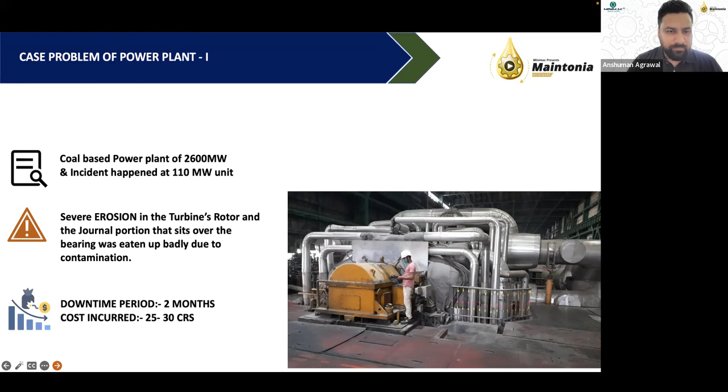The next case we have is from a refinery, and this refinery was having equipment like the wet gas compressor, and the wet gas compressor was tripping very frequently. The main reason behind it was there were seal and gland failures happening. There was a lot of axial vibration, and the suction knockout drum had been observed out there. The key reason behind all these problems was foam formation in the lubrication system, which was actually diagnosed over the period of time.

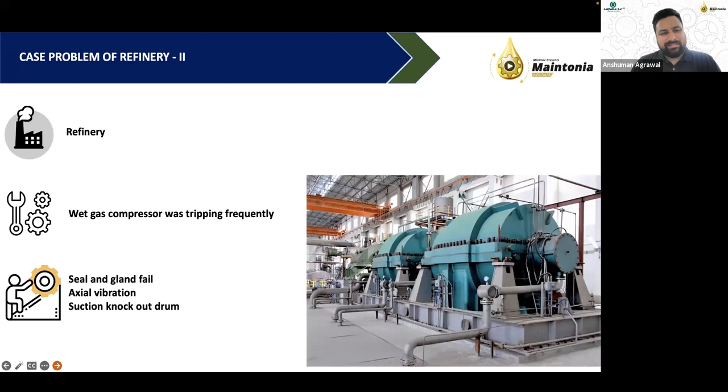The third case is from a steel plant. And in a steel plant, there are large-sized lubrication system tanks in an integrated steel plant. And these are centralized lubrication systems. So they have tanks up to a capacity of 40,000 liters, 50,000 liters. And these tanks are actually partitioned by baffle systems inside the tank. And because of foam formation, what was happening in this particular case, the oil was not able to reach the suction side of the pump.

So there are two parts in a tank which are baffled by an intermediate baffle. So the oil was quite high in level on the return side of the tank, but on the suction side of the pump, the oil was getting starved. And this was happening because of foam formation and many other associated contaminants in the lubrication system.

So in order to find out the answers around such case problems, I would like to invite my friend Rafe Britton, who has actually given his valuable time. And he is based out of Australia, so I'm sure it's already late night out there. But he was kind enough to give his time to share his experiences, his learnings, and his findings around foam formation in lubrication systems. So over to you, Rafe.

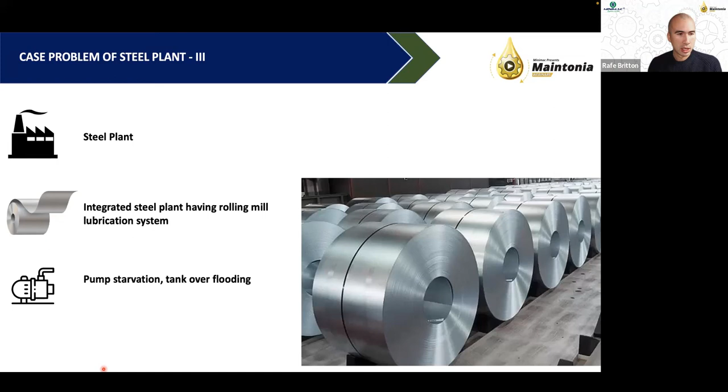So in terms of the agenda, we'll talk about types of water in oil systems, the negative effects of water, water removal methods, and then move on to types of air in oil systems. Talk a little bit about the physics of air in oil. There's some misunderstandings as well about the nature of foam and when does foam get worse versus when is it not so much of a problem. So we'll talk a bit about that. The negative effects of air in oil systems, as well as strategies for controlling air in oil systems.

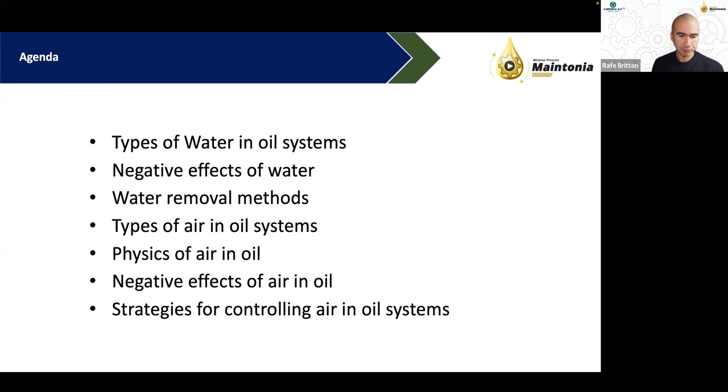Okay. So let's first off start with the types of water in oil, just so that we all have a bit of an understanding. So first of all, there are kind of three types of water in oil. The first is dissolved water. This is water that's not necessarily apparent, right? You can't see it. There's no droplets or anything like that. It's just within the bulk of the lubricant. Now, that kind of water isn't all that dangerous, to be honest.

And as a general rule of thumb, when we want to know how much dissolved water is okay, the rule of thumb that's given is often if you take an oil sample in a clear bottle and you place a newspaper behind it, you should be able to roughly read the newspaper. So as the water content gets higher, the oil tends to get a little bit more cloudy to the point where eventually you won't be able to read the newspaper. That's kind of a general rule of thumb that I use.

Okay, the second type of water that we have is free water. So this is when the oil and the water have completely separated out, and it will be very obvious, right? Either there'll be a little bubble of water at the bottom of your sample, or it'll be a layer that has completely separated out. So free water typically will sit at the bottom of our oil systems, because of the differences in density, right? Water has a specific gravity of 1. Mineral oils are in the ballpark of, let's say, 0.86 to 0.9.

But of course, there are exceptions to this rule, right? If you're using a polyalkylene glycol, which is very common in, for example, gas compressors or even worm drives for gearboxes, that has a specific gravity which is higher than water. And so the water will actually sit on top of the oil. Polyol esters, which are very common in jet oils, have a specific gravity which is almost exactly 1. And so it's not obvious how the water would necessarily separate out.

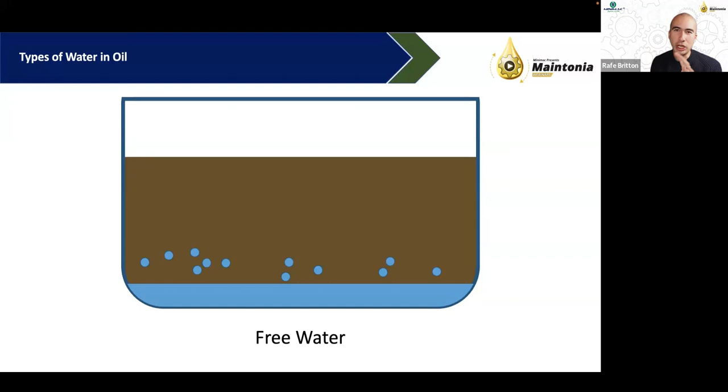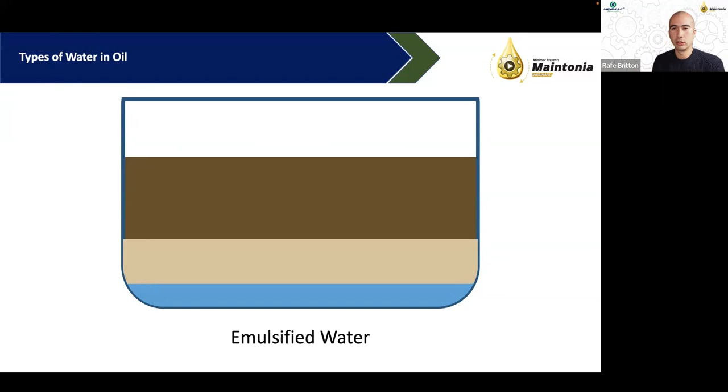The third type of water is emulsified. So generally you can think of emulsified water as a dispersion of micro droplets of water which are mixed in. And generally it presents itself with that milky appearance. And we'll talk a little bit more about emulsions as well. Okay, so they're the three general types of water that you'll encounter. Now, you should probably be familiar with the saying that oil and water cannot mix, right?

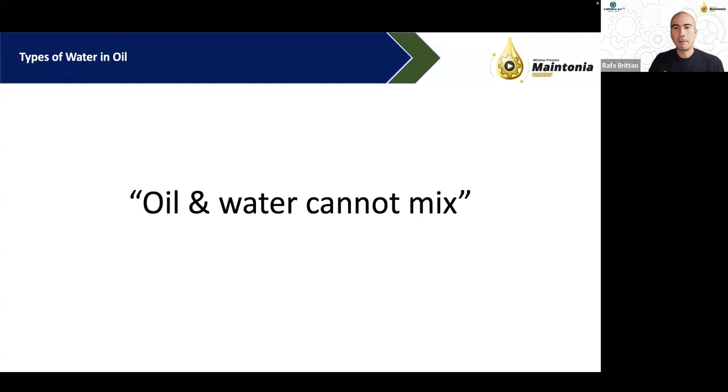This is something that my grandfather used to say to me all the time, but he was talking about girls I dated, saying that there were certain girls that were not right for me. But oil and water cannot mix is kind of like a universally understood expression. But the fact is that there are many oil and water mixes that we encounter on a day-to-day basis, and we may not even think about it.

So butter, for example, is an oil and water emulsion, right? It's a mix of animal fats, which are oils, as well as some water. Same goes for milk, right? Milk is an oil and water emulsion where the two are mixed together. So let's think about why is it that water and oil generally don't mix, and then we'll talk about the cases in which they do mix.

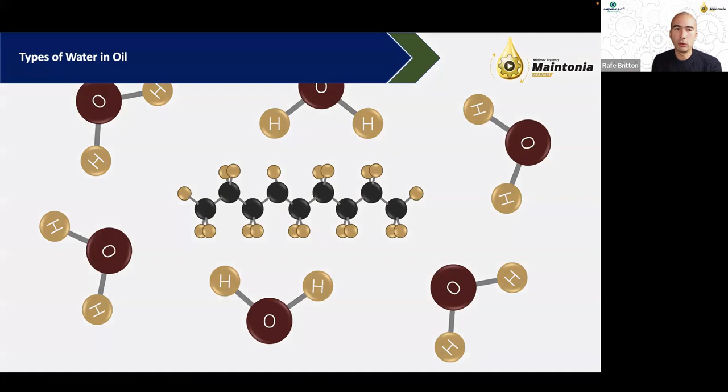Okay, so why don't water and oil mix? Fundamentally, it's because they're dissimilar molecules. So water, for example, is highly polar and can form hydrogen bonds. So if you were to look at it, the hydrogens are generally what we would say positively charged, and the oxygens are negatively charged. Whereas most oil molecules, and this is very true for the paraffinics, especially for synthetic polyalphaolefins, because they're straight chain mixes of carbon and hydrogen, they don't really have any net charge to them.

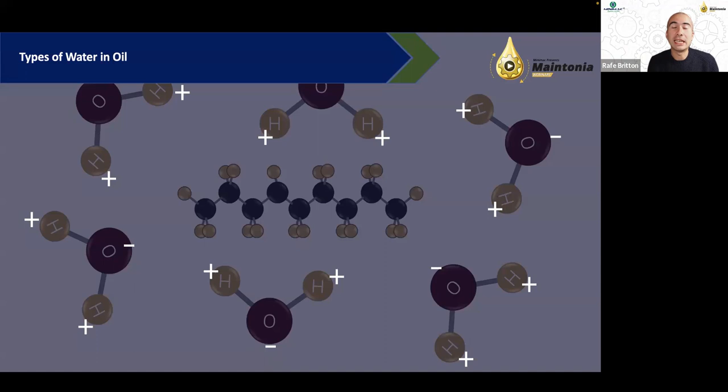So as a result, it's not necessarily that the oil wants to separate out from the water, in so much as the water wants to stick to itself, because all the negative charges want to line up with the positive charges, right? We know that the opposites attract. So if all the water wants to coalesce and come together, it's kind of going to exclude all the oil. And that's why we get that separation of water and oil. It's all got to do with differences in polarity.

Now, that should immediately trigger something in our mind, because we know that not all oil systems are non-polar, right? So esters, for example, are quite polar. Polyalkylene glycols are even more polar than that. And so they tend to mix with water differently.

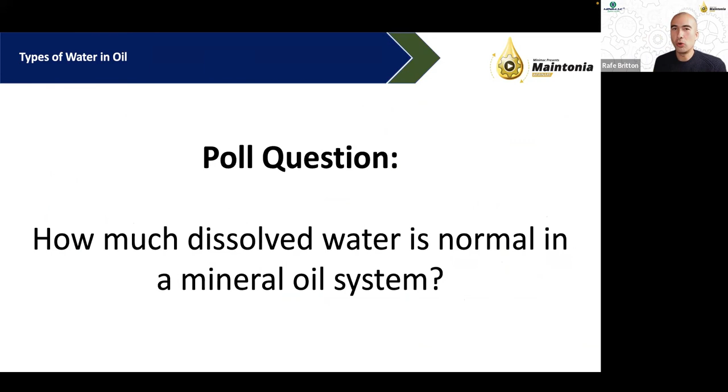So I'm going to start with our first poll question. And the poll question, first up, how much dissolved water is normal in a mineral oil system? And the options I'm going to give you is 1, 0 to 100 parts per million, 2, 100 to 1,000 parts per million, 3, 1,000 to 10,000 parts per million, or 4, 10,000 to 100,000 parts per million. And I'll just briefly wait for your responses.

All right, 0 to 100 was the most common answer, which is really interesting. So in my experience of testing most oil systems, I tend to find that 100 to 1,000 is pretty normal. And that's because in mineral oils, especially the group 1s, there is a certain amount of polarity. And so they naturally tend to pull some water out of the air, right? So they're what we would call hygroscopic. As a result, there is a certain amount of dissolved water in the oil.

Now, what's interesting about this is that the answer varies depending on the oil condition as well, right? So we know that, for example, a new oil will tend to take on less water than an older, aged oil. So through the aging process, as an oil oxidizes, it becomes more polar, and therefore that increases its affinity for water. So oxidized oils tend to take on more water.

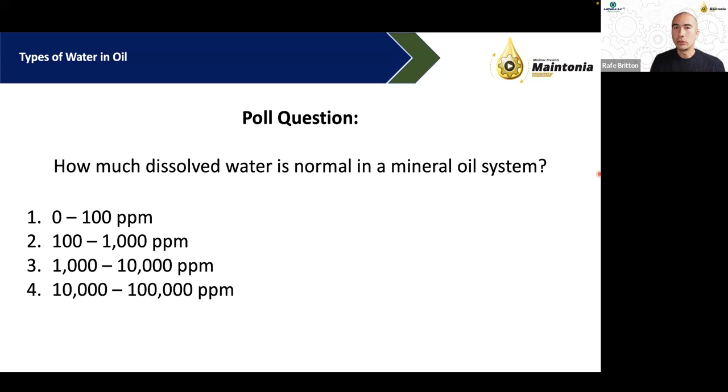Now let's talk a little bit about how emulsions form as well. So, for example, you will have encountered probably mayonnaise at some point. Mayonnaise is yet another oil and water emulsion. So the two main ingredients of mayonnaise are vegetable oil, usually, and water. And how do you make it? If you've ever made mayonnaise from scratch, it's actually an exercise in mixing oil and water, and we whisk it together with an egg. So, why is the egg, aside from taste, crucial to the process?

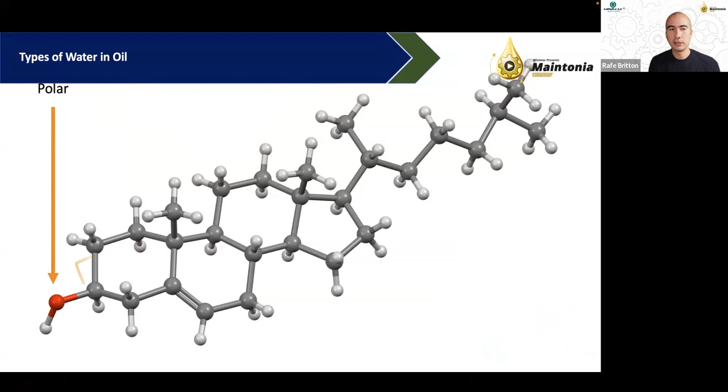Well, the actual key part of the egg, which is helping to bind the oil and the water together, is this molecule, which you'll be very familiar with because this is actually a cholesterol molecule, right? So obviously cholesterol is supposed to be very bad for you, bad for the heart, etc. But what we're interested in here is its characteristics and how it wants to bind with both water and oil. And the reason it can do that is because cholesterol, being an alcohol, has a polar functional group at one end, and then this long kind of oily tail.

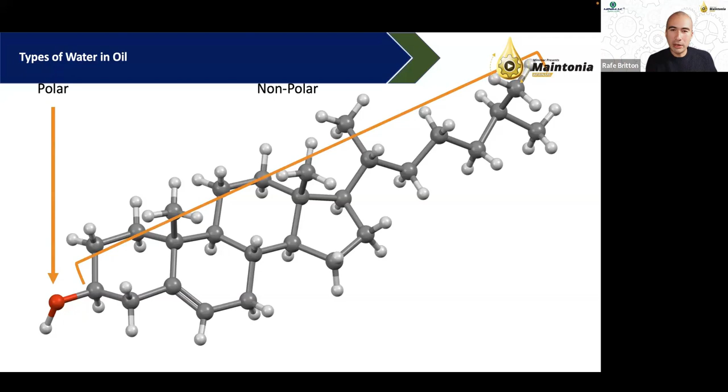So we have a segment, all the stuff in gray wants to bind to oil, and the red bit, which is the oxygen, wants to bind to water. So if we have a cholesterol molecule in an oil and water system, the head of the cholesterol molecule is going to want to bind to the water. The tail is going to want to bind to the oil, and it can then hold that micro droplet in suspension. And if we have enough of these dispersed throughout, then we can create a stable emulsion.

Now, what are the problems with having water in your oil system? Well, one is viscosity control, right? Usually you would think that if you mix two things, the mixture would have a viscosity which is the average of the two components. So vegetable oil is quite thin, water is quite thin. Theoretically, mayonnaise should also be thin. But of course, what we know is that mayonnaise is substantially thicker in viscosity.

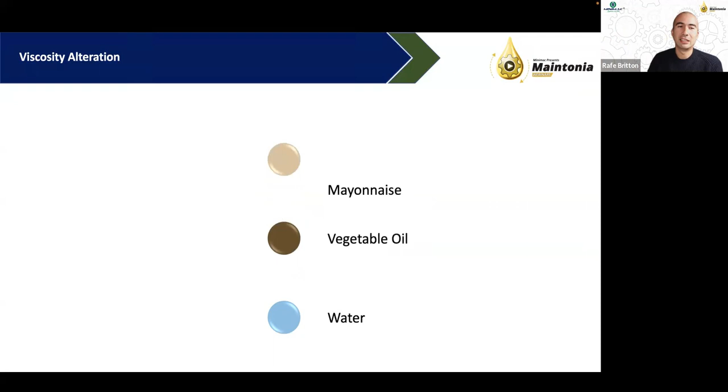In the order of about 6,000 centistokes. I have no idea who actually measured mayonnaise in a viscometer, but apparently it's been done. So 6,000 centistokes is vastly higher than either vegetable oil or water. And that can be problematic. If we create these emulsions, it takes so much more energy to pump that oil around our system. Maybe we run into oil starvation problems because our pump is not able to generate enough pressure to get a significant enough amount of head through all our supply lines. So that can be a huge problem.

Not only that, but we're wasting energy. And as we waste energy, we increase the amount of heat, and heat obviously leads to oxidation. So generally, emulsions are hugely undesirable.

Oh, sorry, I had a question come through, which is hydrolysis. What is hydrolysis? We are going to get to that question in a later slide. So, Mohammed, if you wouldn't mind just holding on for a second.

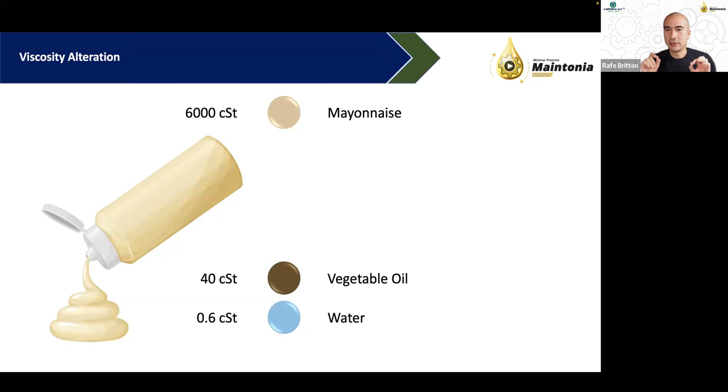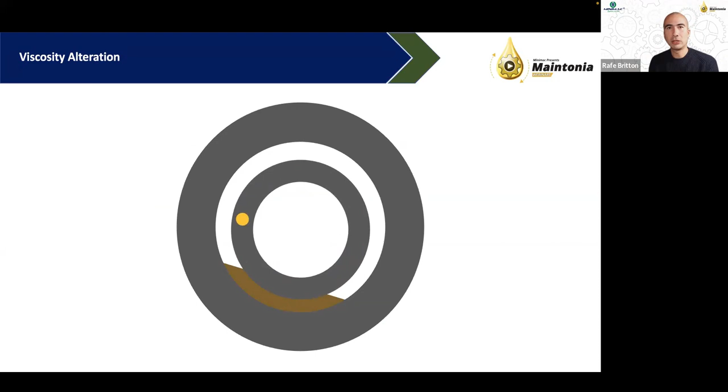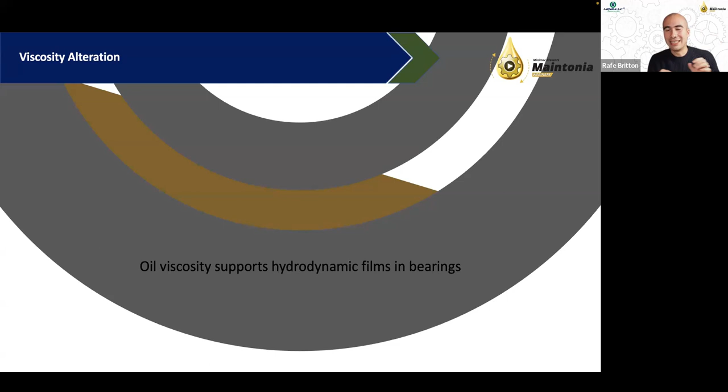All right. Then we have viscosity alteration as well, in terms of what happens if free water gets into our load zones. So, for example, with a journal bearing, the two surfaces are separated predominantly by the base oil, and it's the base oil's viscosity which is giving us that separation. So it supports both hydrodynamic as well as elastohydrodynamic film thicknesses. But if we have free water in our system, then at some stage that free water is going to get to the load zone, and water just isn't able to support the same kind of load that oils are.

That's why we don't use water as lubricants, because otherwise they would be very, very cheap and plentiful. And we would love to use water as a lubricant, but it's not effective at protecting machine surfaces. So as a result, we get a collapse in that film thickness, and we get a whole bunch of excess wear, which is obviously going to be damaging to all of our equipment.

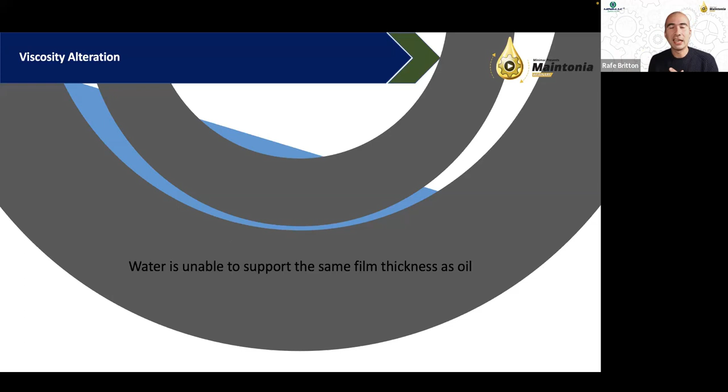So the viscosity alteration is kind of two-pronged. If we get free water into the load zone, it collapses. And if we get emulsions in our system, that can lead to excess heat, excess energy, as well as oil starvation. Now, another problem with having water in your oil system is a process known as cavitation. So typically we associate cavitation with air bubbles, but in actual fact, what can happen is if you get

Think about where there are massive changes in pressure in your oil system. Typically where it occurs is at the pump, because you're taking a liquid that is at low pressure on the suction side, and then you are charging it with very, very high pressure as it goes to the discharge side. So if you have a vapor bubble which is created, then as you exert a whole bunch of pressure on it very, very quickly, you are going to collapse it and also vastly increase the temperature as well because of the ideal gas laws.

So they've taken some high-speed camera images of what a collapsing water bubble actually looks like. And effectively what it does is the water bubble kind of implodes in on itself, and you get this almost like a supersonic jet, which is hitting the metal surface, and slowly over time, it will pit that metal surface.

So if you've ever seen cavitation on a propeller of a boat, for example, you will know what that looks like. And in your pump, you'll be able to recognize it by the sound. So it'll sound like someone has thrown marbles into your pump, into your oil pump. It will be a very, very unusual sound, and that will be an indication that you have cavitation, which will very quickly lead to all kinds of erosive wear.

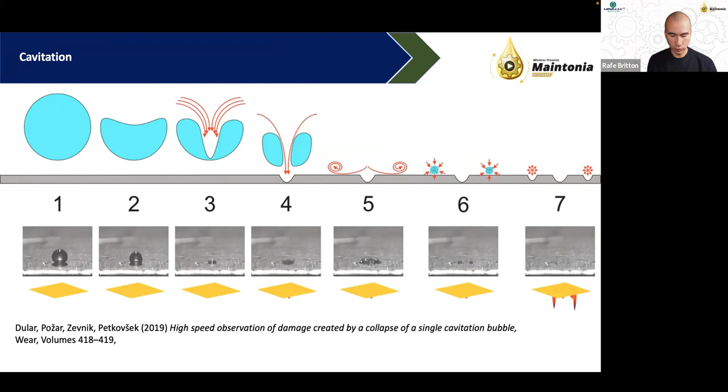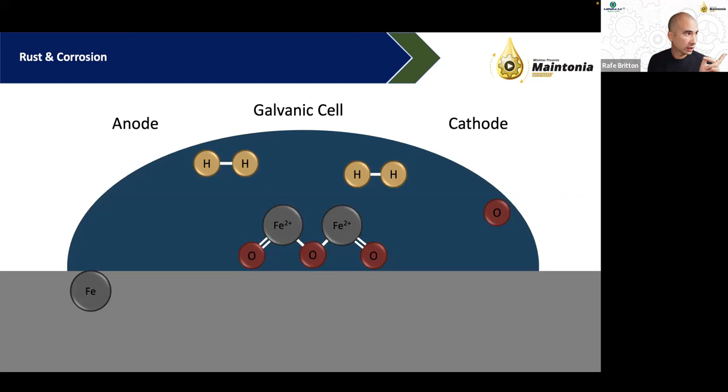And another problem with having water in your oil system is the problem of rust, right, and corrosion. We know that water is kind of essential for creating rusting systems, right? So the presence of water can be really problematic. Now, just to get on to Mohammed's question, right, we're now going to address hydrolysis.

Okay, if you want to create an ester, so any of the synthetic esters, for example, the way that you create it is you react an acid with an alcohol. Now, for example, among the aviation jet oils, so all of the turbines that are bolted to aircraft, they are polyol esters. So you're reacting, generally it's an acid that's derived from palm oils with a synthetic alcohol, and you get a polyol ester and you get some water. And then what you need to do is you need to dehydrate the water away, right, to leave yourself with just the ester.

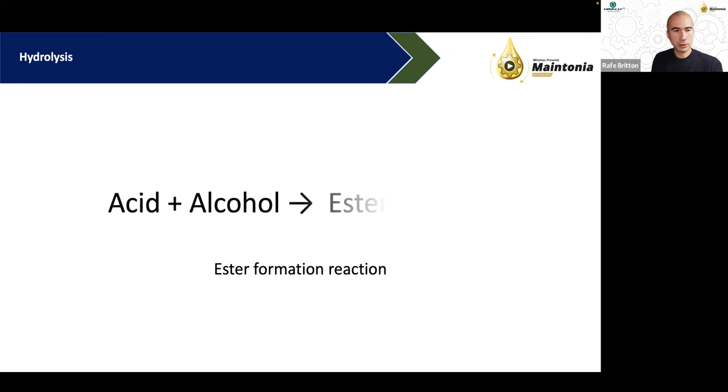The problem is that if now an ester comes into contact with water, what we're actually doing is we're driving this reaction in reverse. So we're upsetting the equilibrium. And so an ester will actually break apart and it will form an acid and an alcohol, right? Now, that's undesirable because obviously that's raising the acidity of our oil. So our total acid number will go up.

But not only that, acids promote even further corrosion, right? So the presence of water alone is going to potentially cause corrosion. But then if we include acids into that water phase, we're going to promote even more corrosion, right? So that's one example of a hydrolysis reaction. But hydrolysis doesn't just occur in esters. It occurs in all kinds of lubricants.

So as an example, there are many additives which are basically metal salts. So the way that you create a salt is by reacting an acid and a base. So as an example, the most common anti-wear additive in the world is an additive called ZDDP. You may have heard of it just being called zinc, right? Its actual name is zinc dialkyl-dithiophosphate.

And it's created by an acid-base reaction, right? It's the reaction of basically a thiophosphoric acid with a zinc oxide. And you get ZDDP, which is actually a metal salt. Well, what that means is that if we add water to ZDDP, we get a similar kind of reaction. It hydrolyzes and it wants to devolve back into its components.

So I'm going to show you something which I think is a pretty cool bit of chemistry, to be honest. I know the audience here is more of a kind of industrial bent, but I want to show you what happens in engine oils when we expose zinc to water. This is a really important reaction, right? Because water is one of the most common contaminants and zinc is one of the most common additives. So we'd love to understand what happens when the two come into contact with each other.

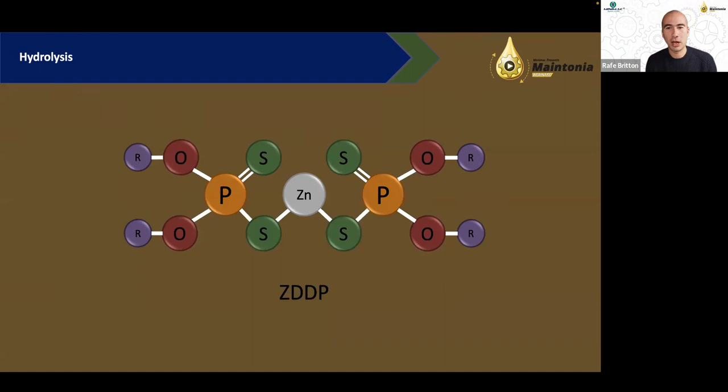Okay, so let's say, for example, I have a ZDDP molecule and I'm able to react it with a decent amount of water. How would this happen? Well, obviously, we've already talked about some of the sources of water, but in an engine, if you got a coolant leak, for example, into your crankcase, that would be a prime case for where this would happen, right? Because obviously, most coolants are about 50% water and 50% glycol.

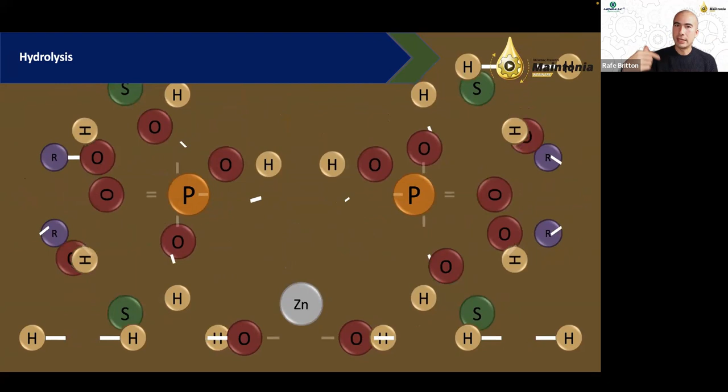Okay, so the water reaction with ZDDP is going to be that hydrolysis reaction. And it devolves into a number of different components, right? Chemistry here is a little bit complex, but let me just point out some things to you. All right, so on the screen here, in the bottom left and bottom right, that's H2S, right? Now, the problem with H2S, hydrogen sulfide, it's that rotten egg gas.

When it oxidizes, H2S forms SO2, which oxidizes again to form SO3, which when mixed with water forms H2SO4, which is sulfuric acid, right? And as you can probably appreciate, it's not good to have sulfuric acid in your engine, right? It can do all sorts of damage to particularly copper-based and lead-based crankshaft bearings, as well as big and small end bearings, right?

Not only that, but we have the formation of these alcohols, and alcohols tend to be slightly acidic as well. So we're adding more acids into the system. We've got a little bit of base with this zinc hydroxide, and then these molecules in the middle are called phosphoric acid. So again, more acids that we're creating, which are bad for our oil system. Now, the thing which is unique,

Just quickly, Mohammed has asked, can we say that hydrolysis is a water reaction with another material? Generally, yeah, I guess that's probably true. So in an oil system, we just generally say hydrolysis reaction is what happens when water causes some kind of molecule to decompose, right? Hopefully that's a decent answer to that.

Now, calcium phosphate forms crystals, right, which look like this. And I'd just love to see maybe in the chat box, does anyone know what this is, just by any chance? So far, no answers, but I'll give you a clue. The source for this picture comes from stonerelief.com. So what we've actually created is a kidney stone, right?

So there are obviously many different types of kidney stones. I've heard that passing a kidney stone is one of the most excruciating experiences that you can ever have in your life. Like, it's on par with herniations. I hesitate to say childbirth because I have no experience of that, right? But I've heard it's unbelievably painful. And that's because they're so abrasive and they're so hard as well.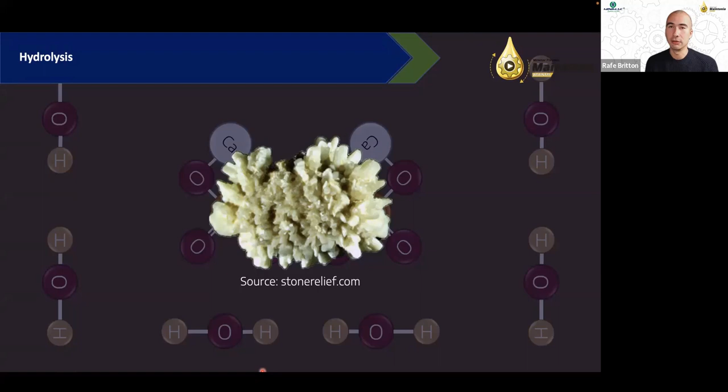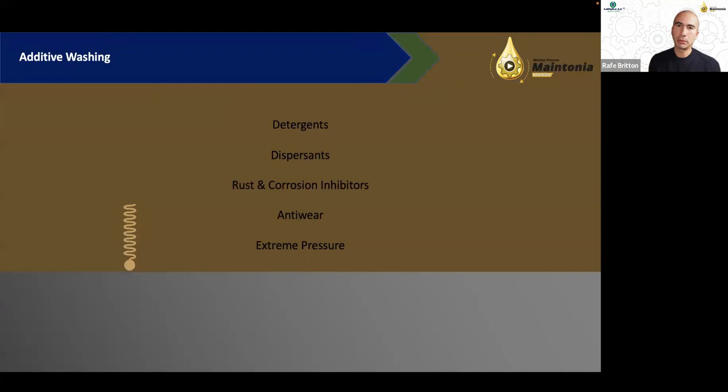And you are actually creating kidney stones in your engine as the result of the reaction of water with some of the additives in the lubricant system. So again, hopefully I'm impressing on you the fact that water is bad for your oil system. Not only that, but it can also cause disruptions in the way that the additives behave. So a lot of these surface acting additives, the whole purpose of them is that they're supposed to want to bind to contaminants.

Now, you've got to remember, additives are dumb, right? They don't have a mind of their own. So the way that we get them to connect to something else is purely by polarity. We can't tell them to go to a specific place. So a contaminant comes in, it's typically polar. So these detergents and corrosion inhibitors will want to stick to something that's polar. Well, water is also polar. In fact, it's more polar than most of the contaminants. And so it can sometimes attract all those additives and sort of throw them off the scent.

So we've established that water is terrible for our oil system. So how do we actually prevent it from getting in there? So number 2 poll question. And I've seen a couple of questions have also come through, so I'll address those too. So next poll question. Do you think that water can penetrate a sealed oil drum? I'm only going to give you 2 options, yes or no.

And while that's being answered, Sharik has also asked the question, why is there a suction problem in the pump's power pack? And I believe that's probably related to our slide on cavitation. Do you think that water can penetrate a sealed oil drum? Vast majority say yes, and that's excellent, right? That's really good because it can, and we'll address that very, very soon.

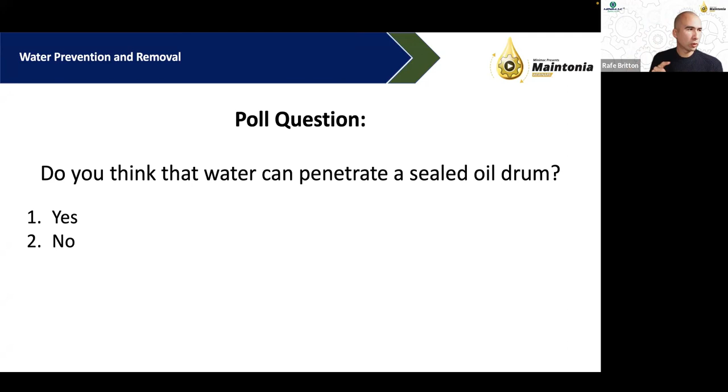Okay, so let's talk a little bit about water control strategies. So if you think about sources of contamination, we sort of have to think about what is the life of a lubricant. And it goes from manufacturing right down to when we use it in the application. Now, most of the people on this call are end users, right? And so you don't get much of a say in the manufacturing, packaging, and distribution. Where your responsibility really kicks in is in storage through to using it in the application.

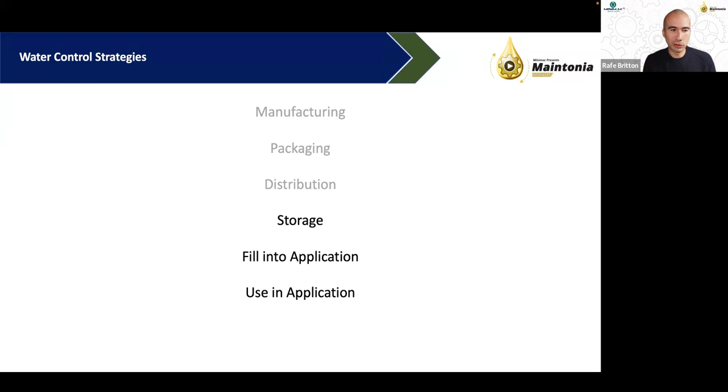So let's talk a little bit about storage. And this is when we talk about the drum. So the problem with oil drums is that they can't be airtight. And the reason for this is because you need to allow a bit of thermal expansion. So let's say, for example, I leave an oil drum outside and it's got some rain on it. There's some condensation. You can see there's some water on the lid of the drum. Now, if we have the sunrise, then the warm oil is going to heat up and it's going to expand, and it's going to expand more than the drum does. So it's got to force air out somehow, right? Otherwise, the lid would basically pop right off.

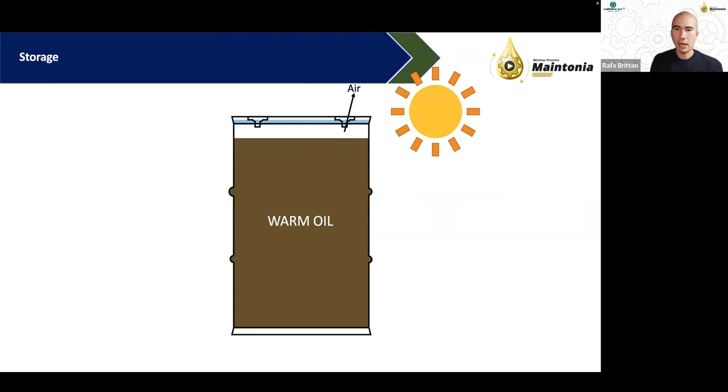Now, when this whole system cools down, you're drawing a vacuum in the headspace, and that's going to cause that water to be drawn through the bungs, right? And so that's how water can get into sealed containers. So it's really important, even when we have perfectly new oil, to do everything we can to store them. In a climate controlled environment with an air conditioner would be perfect, but that's not practical, right? So at the very least, if we can do it, indoors.

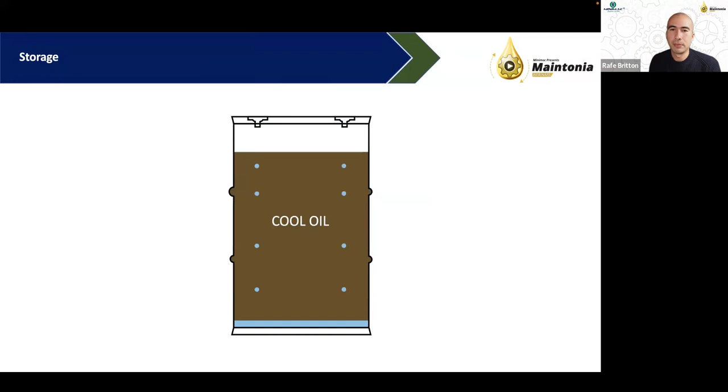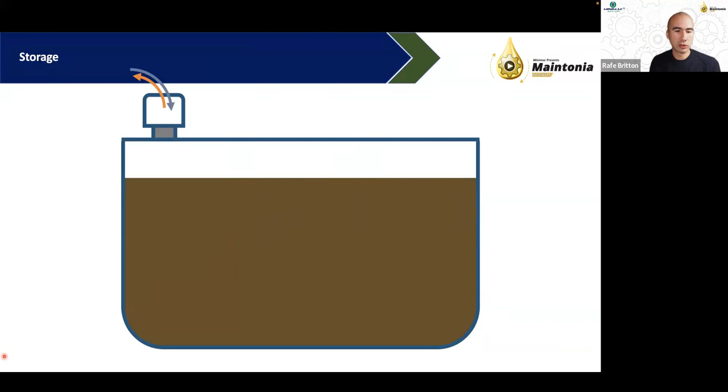All right. The other thing as well is about using desiccant breathers to prevent water from getting into the headspace. So this is just a very, very simple and cheap way of reducing the amount of water that ingresses into your oil system, right? So the way that these typically work is that humid air is coming through, right? The desiccant is exactly the same as the silica gel that you often find in food packets. And it is hygroscopic. It likes to take on water. And as the air passes through, it gets dried, and then dry air goes into the headspace.

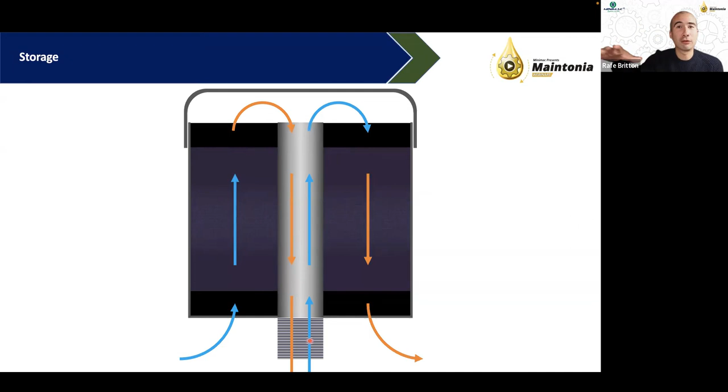Now, unfortunately, some of these breathers are built such that they actually dry the air coming out as well. And that's going to mean that you use up the desiccant at twice the rate that you need to. In reality, what you want is a one-way valve, because you don't care if the air that's exiting is wet, right? You want it actually to bypass the desiccant. So that's one thing to look at when you're purchasing these.

All right. So we've already talked about water ingress prevention. One of the other ways that we can get rid of water is by trying to coalesce all the water droplets, right? Now, this rather complex equation that I've got up on the screen is how fast a water droplet falls when it's in oil. So this is called the Stokes equation, and you can use it to calculate the speed of a metal ball, for example, dropping in a cylinder full of oil.

So it's dependent on the density of the water and the density of the oil, the viscosity of the oil, gravity, because that's the thing that's pulling it down, as well as the radius of the water droplet. So if I can increase the radius of the water droplet, it's going to fall faster. It's going to separate out faster. And so we have a bunch of coalescing methods, which are designed to coalesce all the water together.

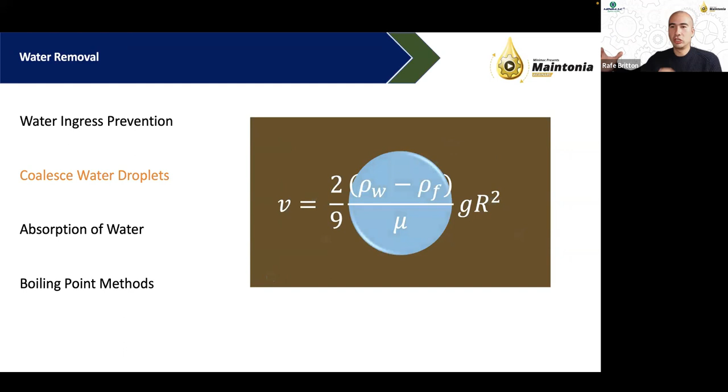Now, the other way that we can do it, which is a little bit cheeky, is that we can also increase the gravity term, right? You might think, well, that doesn't make any sense. How can you increase gravity? But that's how centrifuging works, right? So we can have a centrifuging filter, which is designed basically to increase the rate of acceleration. And as a result, the water will separate out much faster. So that's another method that we can use for removing that.

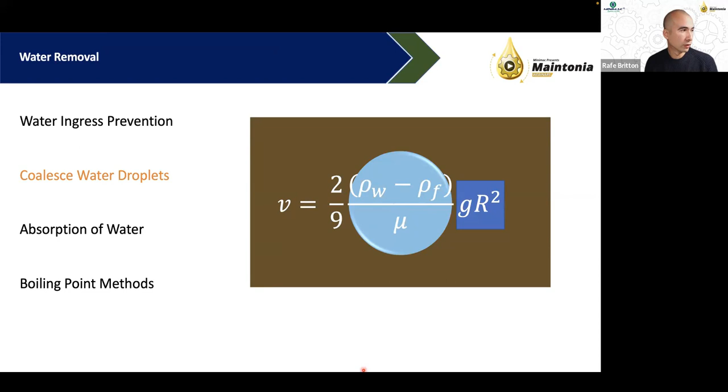Okay, absorption of water. So, just regular cellulose, which is to say paper-based filters, can actually absorb a small amount of water. I wouldn't want it to take on thousands of parts per million.

But, just as if you leave wood out in the elements, it will warp and it will expand. And that's because timber, which is also made of cellulose, is hygroscopic. It takes water out of the atmosphere. Our cellulose media filters will do exactly the same thing, right? They'll tend to take on water. There are also some super absorbent filters that can help remove water as well. So that's something to look at.

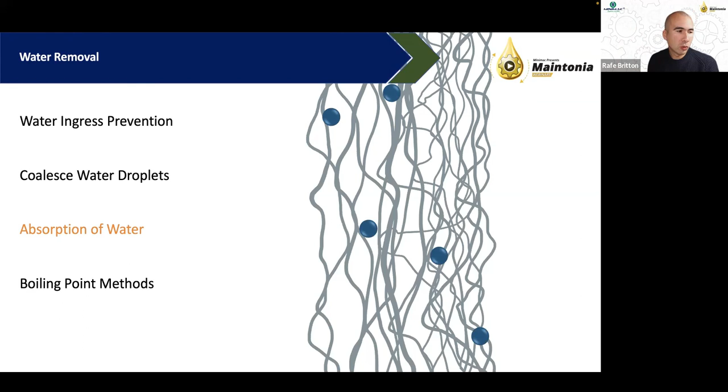And one of the final ways, which is probably the more expensive, but very, very useful for high volumes of water, is those boiling point methods, which is basically vacuum dehydration, right? So as the atmospheric pressure reduces, the boiling point of water also reduces. So the idea is that if we can create a vacuum in this headspace here, then we can reduce the boiling point of water down to, for example, 60 degrees Celsius or something like that. And then we only need to heat up the oil to around 60 degrees Celsius, and then the water will effectively boil off.

Right? Now, these are obviously going to require a little bit more maintenance, because now you have a pump, which is under a fair bit of negative pressure, but it can be worth your while if you're trying to remove a lot of water at one time.

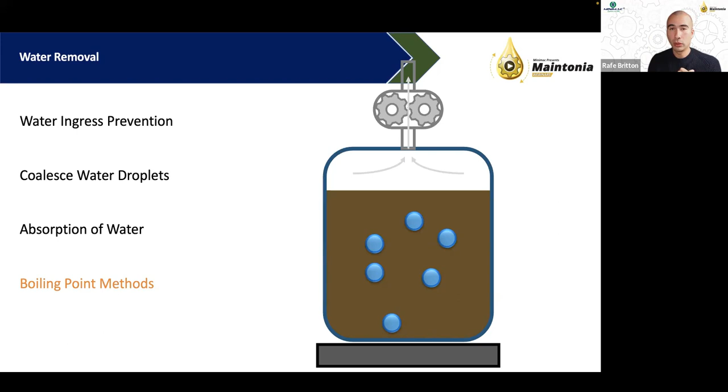All right. So Amos is asking about foaming in a lubrication tank. So we're going to talk about foam now, right? Because one of the other negative effects of water, which seems a little bit counterintuitive, is actually foam formation. So let's talk a little bit about the types of air. We already talked about the types of water in oil. Now let's talk about the types of air. Just like there was dissolved water in oil systems, we also have dissolved air. You can't see it, it's not apparent, but it's there.

And in a mineral oil, my understanding is that around 7% of the volume is probably actually dissolved air. In something like a polyalphaolefin, it's probably lower, around 2% or something like that. So that's dissolved air. Not much you can do about that, because the amount of dissolved air is more or less determined by the atmospheric pressure.

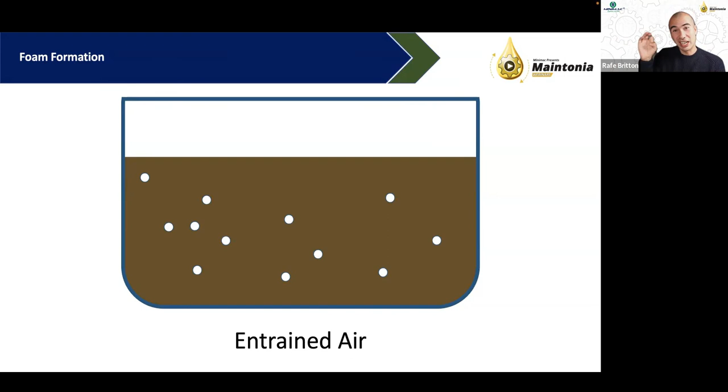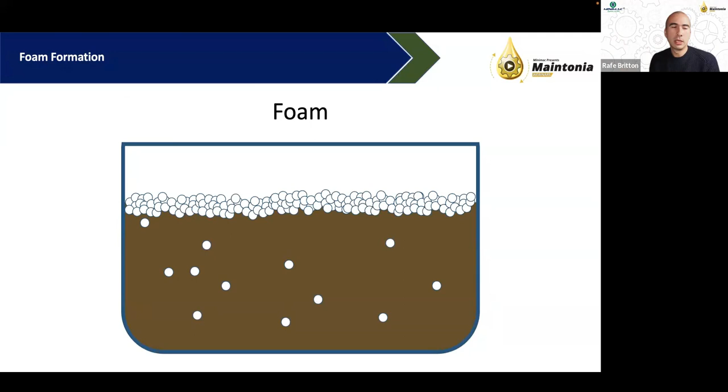All right. Then there's entrained air. Entrained air is held within the body of the lubricant. So we have little bubbles in the body of the lubricant, and if you ever drank a Coke or a beer or anything like that, those micro bubbles that are in the liquid, you would call that entrained air. Then we've got foam, right, which sits on the surface of the tank. That's kind of the difference with foam. And then, of course, there is another type of air which is often neglected, which is free air, which is the actual headspace itself. So four different types of air.

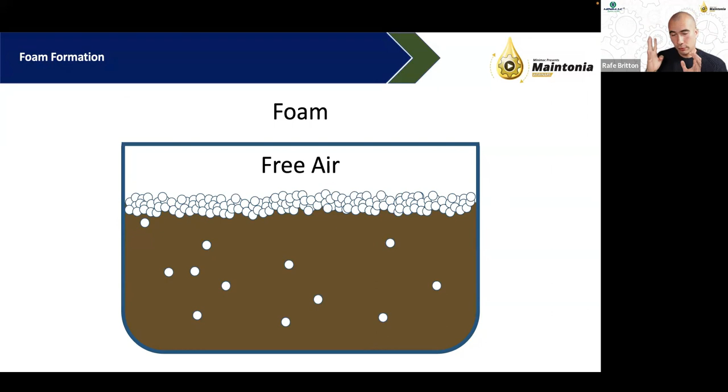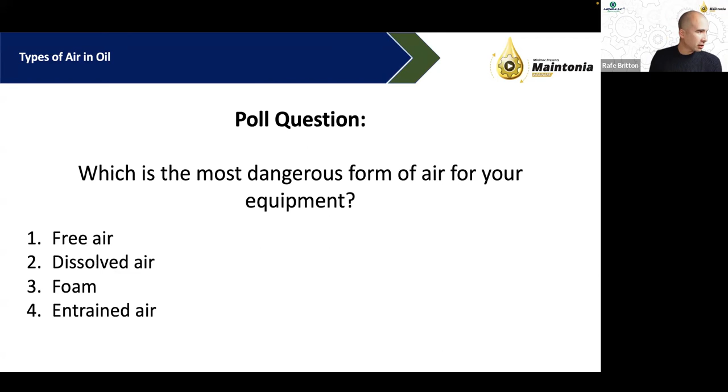Now, I noticed that in the Q&A box, Pradeep has also put in a comment that online filtration machines will help keep us on track. And that is true. Where at all possible, use filtration, right? I know there are plenty of places which are not using any kind of filtration at all. But like I said, even cellulose-based filters that you would be using to pick up particles can actually pick up a small amount of water as well. So that can help with controlling the amount of water.

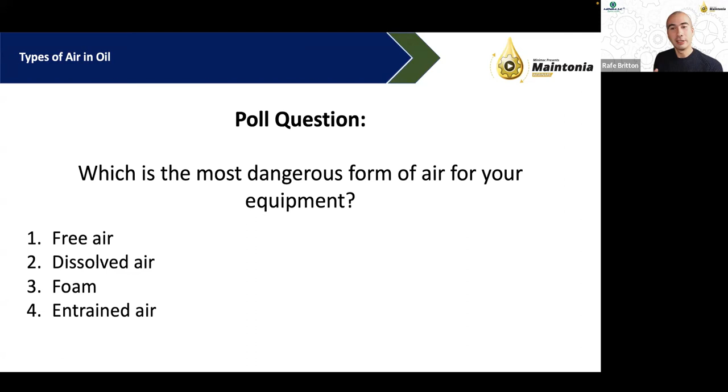All right, we have some answers. That's interesting. Okay, so foam is the leader with 49%, dissolved air second with 26%, and entrained air at 21%. Now, I'm going to go through the reasons. I think foam and entrained air could both be the correct answer to this question, just to be clear. But the difference is that foam is actually necessary for the functioning of an oil system, right? So in some cases, foam can be beneficial. I can't think of any cases where entrained air is beneficial, right? So let's talk about that a little bit more.

All right, so let's talk about foam formation and when that's a problem. Foam formation can typically be a problem from a safety perspective, right? If we have foam that's actually spilling out, now we have oil on the floor. That's a safety hazard in terms of slips, trips, and falls, right?

Obviously, oil is very slick. That's the whole point of oil. So that is undesirable. It also gives us a lot of difficulty when we're trying to control the oil level, either in the application or in the reservoir, right? So if you're looking through a sight glass and there's a lot of foam, often you can't tell where the oil level is, and that can become a problem.

Similarly, in a gearbox, typically you want the oil level, let's say, half to 2/3 of the way up the teeth. And if you're unable to see that because of the high amount of foaming that has occurred, then we may be either over or under lubricating our system. And so that can be a problem as well.

Another major problem is air locks. So what does this mean? It basically means that in an oil line, typically where you have a bend or a high spot, you'll get the foam migrating to the high spot. You can think of air as being like a restriction. It's almost like an orifice. And so where that restriction happens, there's a big pressure drop.

And if the pressure drops so much that you end up with negative pressure at, for example, the suction side of the pump, now the pump runs dry. And that can also be a massive problem because now you starve your application of oil as well. Right? So that can be a major problem.

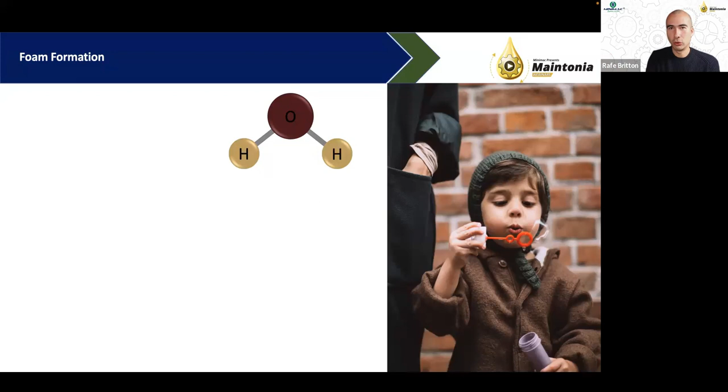So, for example, if you have tried to blow a bubble with just water, either when you were a kid or with a kid, you will know that blowing bubbles with water is a good way to make a kid upset, right? Because nothing will happen. Similarly, if you try to do it with oil, it's almost impossible to blow bubbles with oil, right?

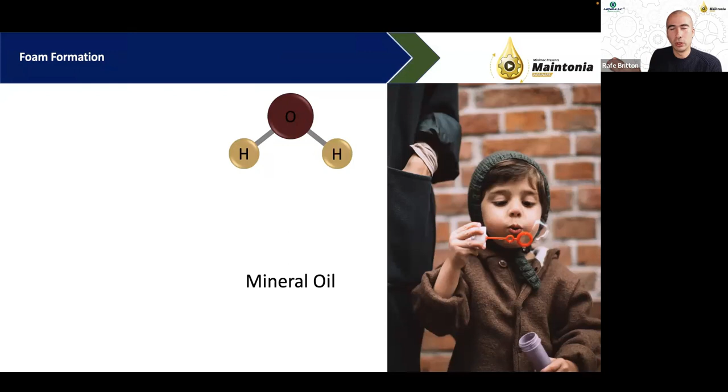Correctly formulated mineral oils and particularly polyalpha olefins, which are very, very nonpolar, display almost no foaming tendency. And that's why polyalpha olefins are very popular in formulations for, for example, gear oils or wind turbine gear oils, because they have very low foaming tendency. Now, as you go up in polarity, you're increasing the surface tension. And I could do a whole other hour on how surface tension works.

But basically, for our purposes, water has too much surface tension. Trying to blow a bubble with water, in material science you would describe it as a brittle fracture. The film is so tight that when you try and put any air through it, it just snaps. Oils, on the other hand, have too little surface tension, which means the bubble film is too thin and can't support the pressure you're blowing through it, and so it breaks.

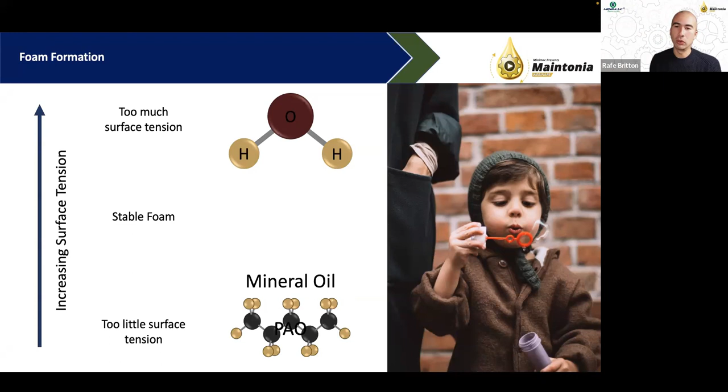There is this kind of Goldilocks zone where we can create stable foam, which is in between water and a mineral oil. And that's one of the reasons why water ingress into your oil system can lead to a foaming problem, because water in your oil system raises the polarity of the overall oil system and can get you into that stable foam level. So now we can generate stable foam.

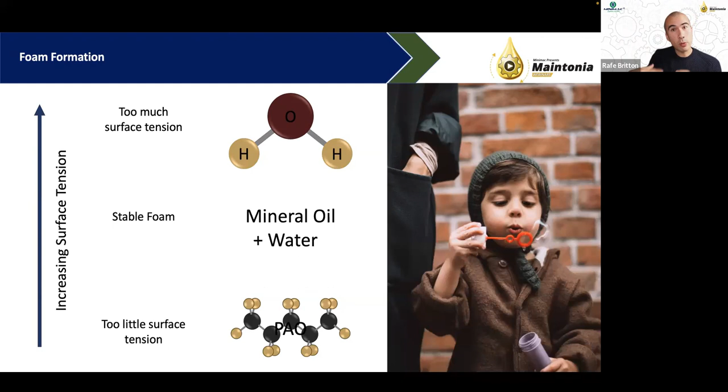The other thing that can do it as well is either soaps or polar contaminants. So where do polar contaminants come from? Oxidation, dust, all kinds of contaminants are polar and therefore can create foaming problems. So often when you see a foaming problem, it is the result of contamination.

Soap, you might think, how do you get a soap into my oil system? Well, grease thickeners are typically soaps. So if you have any amount of grease contamination in your oil system, that's likely to cause a foaming problem as well. Typically this happens when people use grease to seal gaskets and things like that, and a little bit of grease ends up in the reservoir. Now I have a foaming problem.

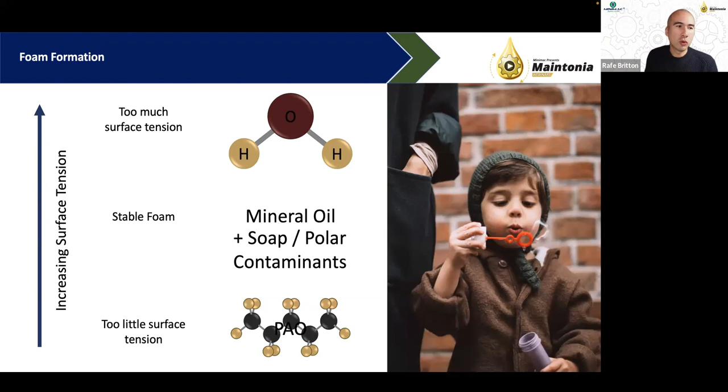And that's because people aren't aware that grease has a soap, and soap results in foam. So that's the problem with foam formation. Now let's briefly talk about the dangers of entrained air.

Now, if I have a lot of entrained air, it can lead to pump cavitation, right? Because now I have an air bubble which is traveling to the pump, and that air bubble is going to get rapidly compressed. That's the perfect conditions for creating cavitation. I also get erratic operation and loss of precision control.

So let's say, for example, if I have a hydraulic system, the whole point of a hydraulic system is that we are using the fact that fluid is incompressible, right? So we can transfer power from one location to another location using the fluid. Well, air, if it gets in, is very compressible. So you can imagine if you're pushing on a syringe and there's lots of air in it, it's very spongy, right? So you're not transferring that power correctly.

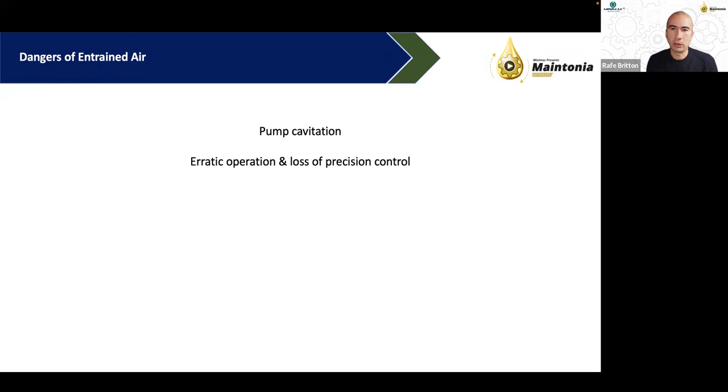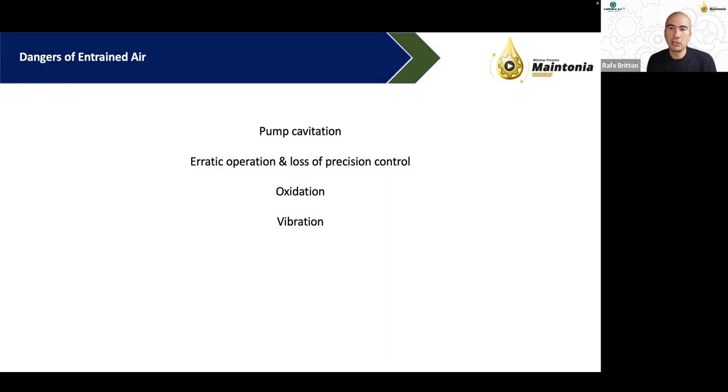Oxidation, right? This is kind of obvious. Oxidation is produced as a result of heat as well as exposure to oxygen. The more air you have in your oil system, the more oxygen. It can lead to vibration through cavitation, low oil pressure switch trips, right? As well as reduced viscosity. Okay, so lots of problems with entrained air as well.

Okay, now let's talk about how we try and prevent air from getting into our system. The first way is to eliminate sources of air. When you look around at kind of a generic oil system, where does air come from? Well, let's say, for example, if the fluid level is too low and I start sucking foam into the pump, right? That's a problem. That's where I'm drawing air in.

But the most obvious way that it happens is generally in the application itself. So if you think about a gearbox, especially one which is splash lubricated or mist lubricated or something like that, as the gears are turning, they're churning all that oil around the gearbox. It's sloshing and it's creating lots of air.

The other place that we can often get it, hang on a sec, I need to sneeze. Sorry about that, but that was going to be very loud if I did it in the microphone.

So that can generate a lot of air, but also as we dump oil back into the reservoir, if the exit point for our return line is way above the oil level, then I've created a waterfall, right? And I'm going to generate a lot of air and foam. So looking at all these locations for ingress of air is often important in trying to troubleshoot where the air is coming from in the first place.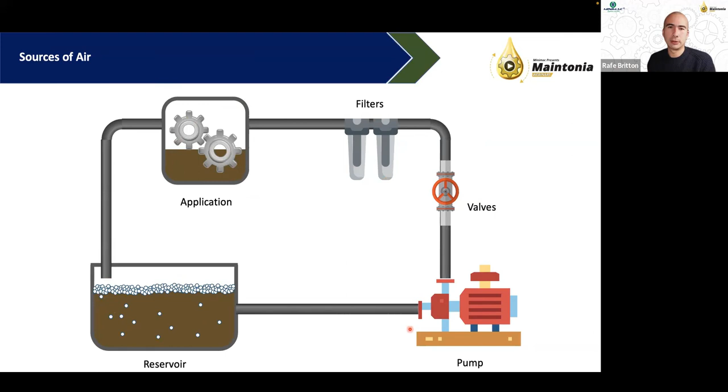All right. Now we're getting on to the point where I'm going to show you where foam is necessary and is actually good for our oil system. So we know, for example, that entrained air is bad, right? Because if it gets into pumps, it's bad. It can reduce the viscosity, that's bad. Same with water, it'll collapse lubricant films, that's also bad. So we need to remove entrained air.

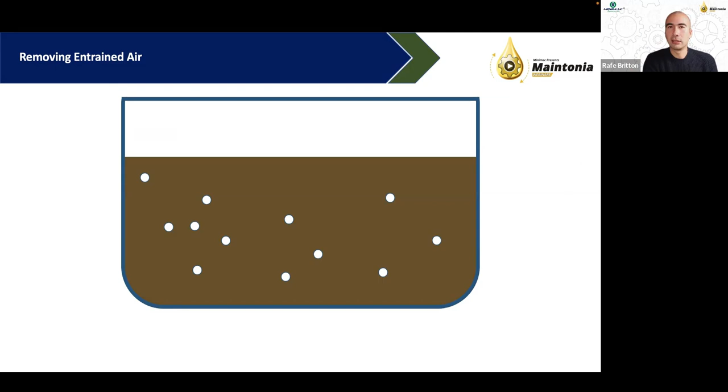Well, practically, the only way that we can really remove entrained air is to have it rise to the surface, become foam, and then have that foam break, right? So the key is it needs to become foam, but the foam needs to be unstable. So that's what we want. And basically the opposite of what we talked about with water droplets is true with air, in that larger bubbles rise faster instead of fall faster.

So what we ideally want is, instead of lots of little micro bubbles, we want those micro bubbles to kind of coalesce together and form large bubbles that can then rise to the surface where they can then pop, right? So in that respect, foam is kind of desirable. So I get some customers coming to me saying that I have foam in my reservoir, I need to do something about it.

The first thing I would caution is, how much foam is there? Is the foam stable or not? That's really the questions you need to be asking. Foam itself is not necessarily a bad problem. The stable foam is a problem.

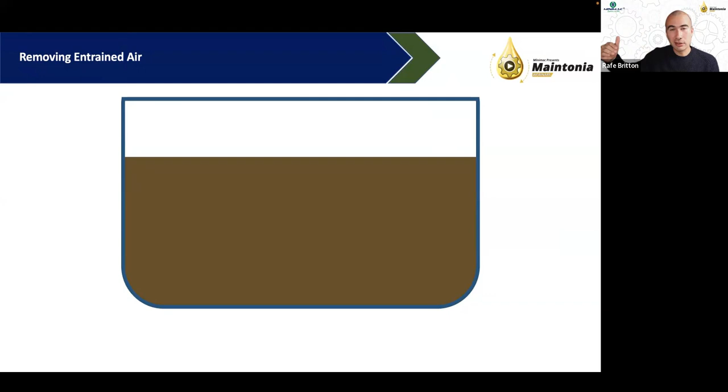So as a rule of thumb, if you can take your oil, put it in a bottle, and shake up the bottle, the foam should dissipate within 10, 20 minutes, something like that. If it stays around, then potentially you have a problem.

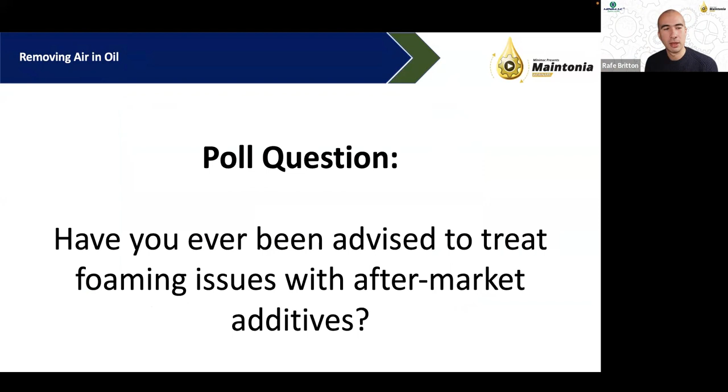All right, so the next poll question, this is the final poll question for the webinar. I'd love to ask, have you ever been advised to treat foaming issues with aftermarket additives? And again, there's only really two options here. The answers are yes or no. All right. Last of the answers in.

And the results are pretty close to 50-50, maybe sort of 60-40. So most people are saying yes. The advice has been to treat with like a pour-in anti-foam additive. And typically, these will be silicone-based. You'll often hear about silicone anti-foam additives. We're going to talk about those in a second. So there is some caution that I'll advise about those.

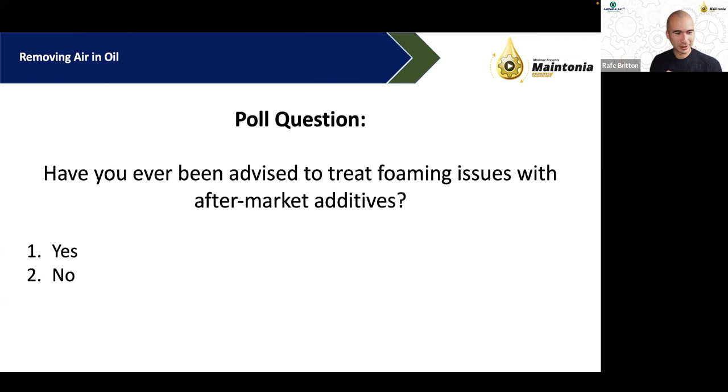All right. If I want to remove entrained air, there's a number of strategies. So remember, I've got a whole bunch of air bubbles and I want them to coalesce. So one of the ways that we can do that is putting in baffle plates. Baffle plates are basically like a nucleation site for the growth of air bubbles. And as they grow, sometimes they'll connect together. And then the larger bubbles will rise faster. So that's one way that we can do it.

The other way that we can do it is just to increase the residence time in the actual reservoir itself. So if you have a foaming problem from the very beginning and it persists, no matter what oil you put in, sometimes it's just a problem with the reservoir design, that it's not large enough to allow the oil sufficient time to let go of all of its air. It needs that time.

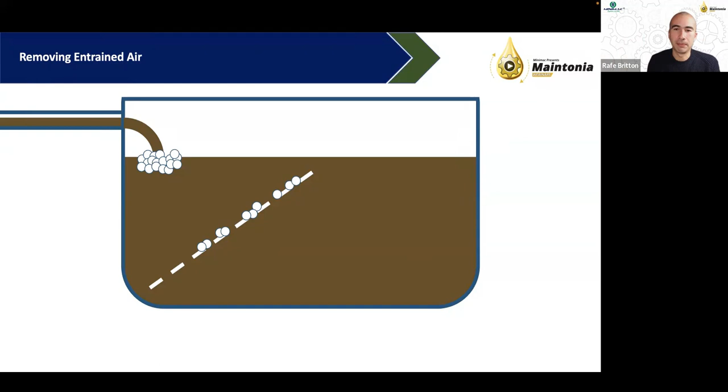The other thing that can happen with foam formation is that the design of the tank might actually be wrong. So typically oil tanks are quite wide. They're not very tall. And one of the major reasons for that is the problem of trying to get the foam to break. Because if I have a tall and narrow reservoir, there's the same number of air bubbles, but I have ostensibly more foam. If it's tall and narrow, there's less opportunity for foam bubbles at the top to break and let the air into the headspace.

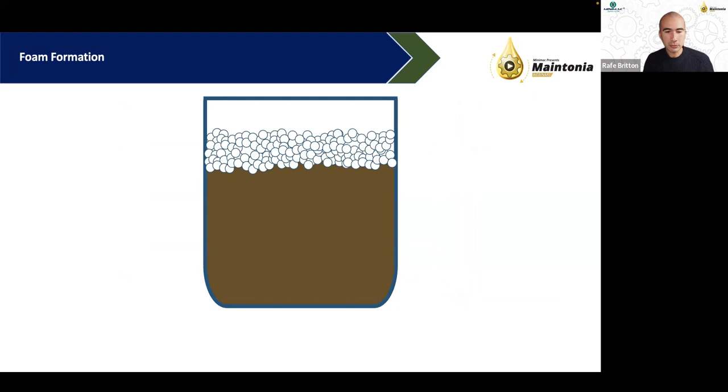All right, so now let's quickly talk about anti-foam additives. So how are anti-foam additives designed? Basically, the whole point of them is that they should migrate to an air-oil interface, and where we want them to do that is at foam. So you'll have these typically silicone-based molecules, which will go to an air bubble and reduce the surface tension such that the bubble will start to thin out. And when it gets thin enough, it can't support the pressure inside, and so the bubble pops. That's the way that they work.

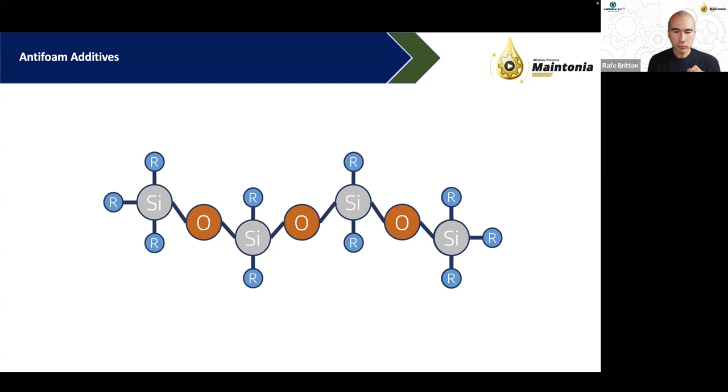Now, silicon anti-foam additives typically look like this. So it's silicons and oxygens, and it's just a long chain of them. Now, there's a couple of problems with these. First of all, their size. Typically, a molecule of these will be in the order of about 10 to 40 micron. That's pretty large for an additive, and it means that they tend to be susceptible to being filtered out, because often with your filtration, you're trying to capture particles smaller than 40 micron. So that's problem number one. Maybe the reason you have a foaming problem is because your filtration is too tight and you've actually removed all the anti-foam additives from the system.

The other issue, and this is where I'm going to talk briefly about the aftermarket additives, is that the way you manufacture these is a very, very closely controlled process in a manufacturing plant. The reason is because these silicon anti-foam additives are not oil soluble. So you basically have to grow the particle in a carrier fluid, and you have to very, very evenly mix it and disperse it into the oil to make sure that it's all held in and dispersed evenly.

So you get a single homogeneous batch. That is very difficult to manage in the field, right? So if you're just pouring in a bunch of silicon anti-foam additives, you're not going to get that level of control that we typically do when we're actually manufacturing these products. And so that can be a little bit dangerous, right? And the reason it can be dangerous is because

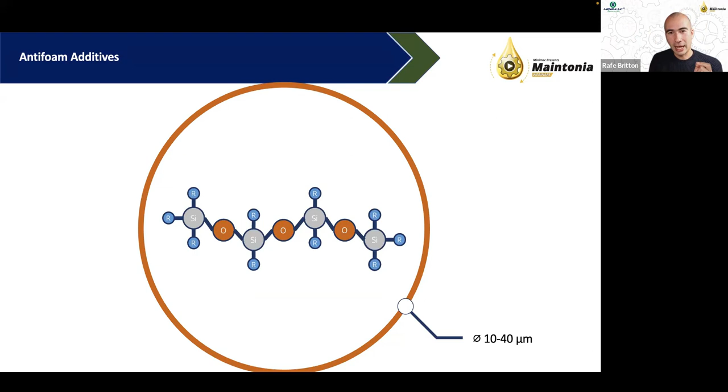these anti-foam additives, like I said, what they want to do is they want to bind to an air-oil interface. Now, again, going back to my earlier statement, additives are dumb. They don't know what they're doing. So if we design them to look for an air-oil interface, they'll go to any air-oil interface. They can't tell the difference between entrained air and foam.

So if a silicon polymer attaches itself to entrained air, the problem with that is now I'm weighing that air bubble down. It wants to rise to the surface and become foam and break and release air, but now it doesn't want to, right? Because it's got this silicon polymer hanging onto it, keeping it down. So that is the danger, is that by over-treating your system with silicon anti-foam additives, you can actually increase the amount of entrained air in the system.

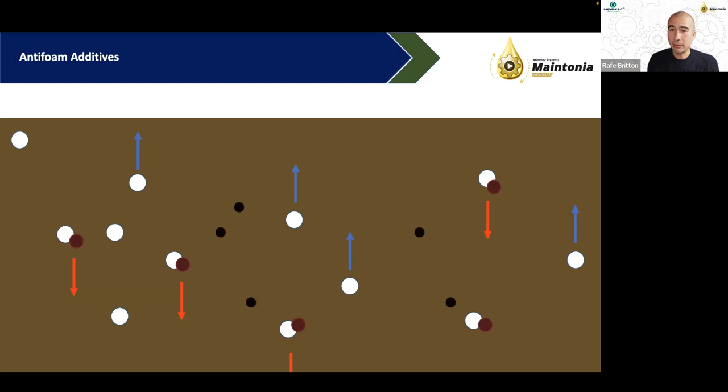The final risk that I'd also like to point out, which can cause a decent amount of foaming, is also contaminants. Polar contaminants can sometimes attract the anti-foam additives, right? And as a result, you now have nothing that can break the foam.